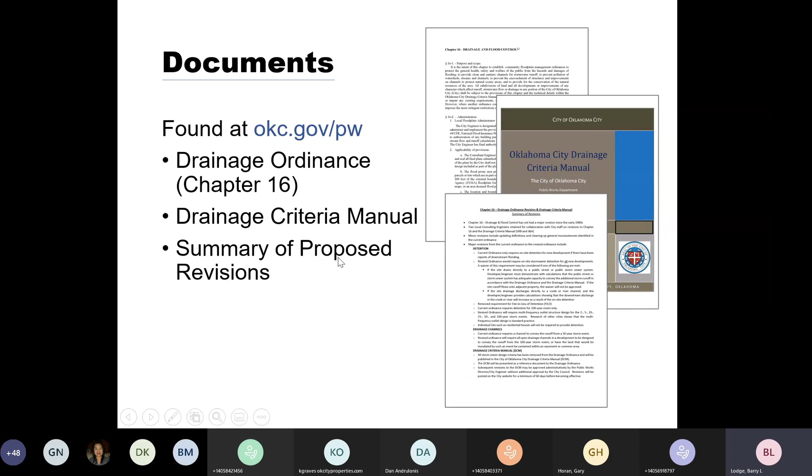What we're going to go over today is the new drainage ordinance that we've revised, and we are putting in place an Oklahoma City Drainage Criteria Manual that's been in the works for about 10 years. Both documents can be found at okc.gov/pw. We have also put up there a summary of the proposed revisions so that you can do a comparison of what has changed. Here are the two documents that we're going to discuss today.

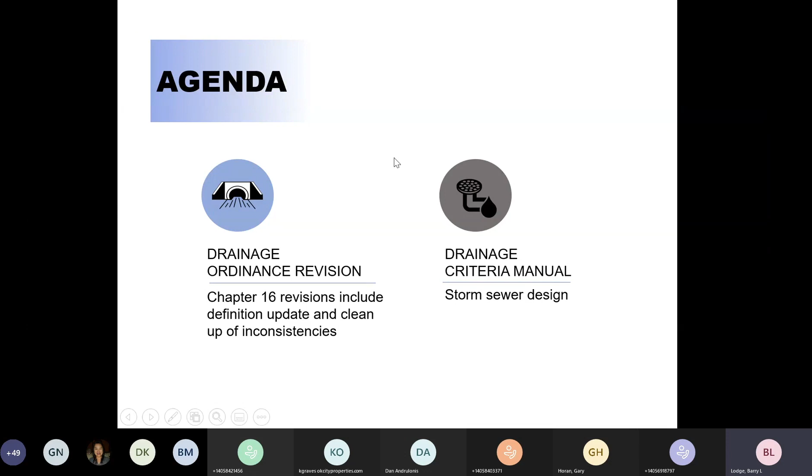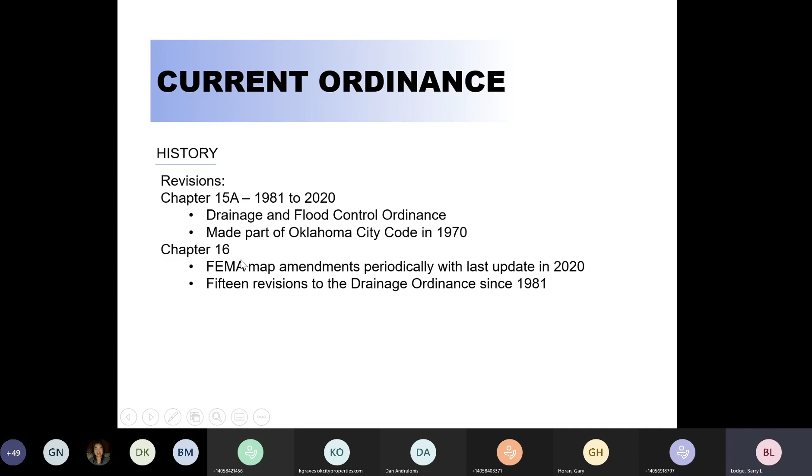A little history here. The current ordinance was developed back in 1970 as Chapter 15A, and from 1981 to 2020, we have had 15 updates to the drainage ordinance, but then also periodic updates to the FEMA maps, which are included in the ordinance. This was made part of the city code in 1970.

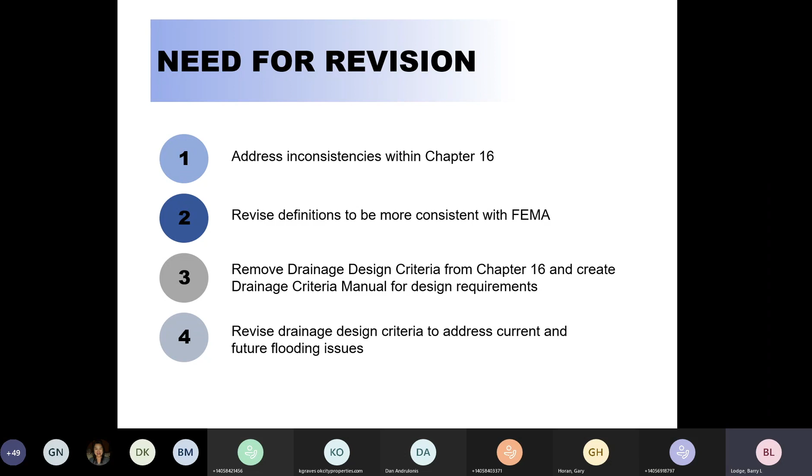And the needs for the revisions: we need to address the inconsistencies with Chapter 16, revise the definitions to be more consistent with FEMA. We need to remove the drainage design criteria from Chapter 16, and that is why we've created the Drainage Criteria Manual for the design requirements. And we're revising drainage design criteria to address our current and future flooding issues. I'll go ahead and turn it over to Barry. He'll give a brief presentation about the changes.

Good morning, everyone. Barry Lodge with the City of Oklahoma City Public Works. I'm going to go through the major changes that we're proposing for the new drainage ordinance and the drainage criteria manual. If any of you were in the meeting last week, a lot of this will be repeat, but hopefully it'll help us all get on the same page.

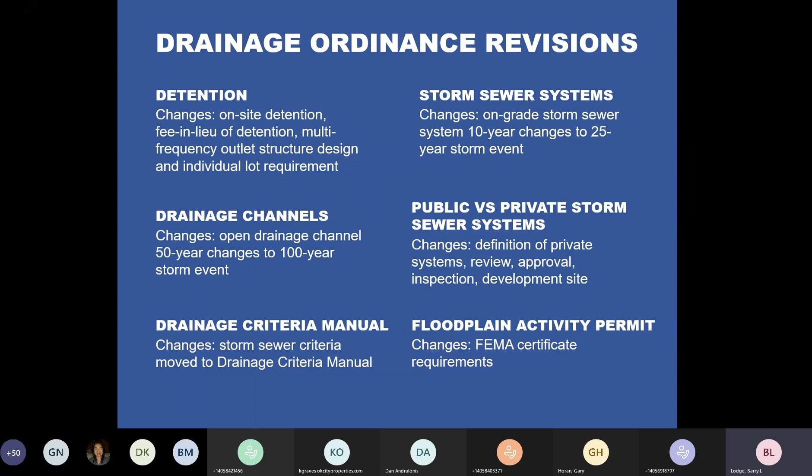I want to start with the revisions that we're looking at on the city detention requirements, and I'm going to start at the bottom of this slide and work my way up these bullet points. One of the biggest changes that we're making on the detention requirements is the change to require a multi-frequency outlet structure design. Currently, the ordinance is written such that we only require detention to be provided for the 100-year storm. We are now going to move into the multi-frequency outlet structure design for the 2 through the 100-year storm events.

We have previously had a provision for a fee in lieu of detention in certain requirements, and consultants that are on the call are probably familiar with that process. With the new ordinance and the new criteria manual, we are going to remove that provision for a fee in lieu of detention. Instead, we will go to a provision for a waiver of the on-site detention requirements if certain criteria are met. So this will put it all back on the engineers and the developers to come up with the calculations to show that the waiver should be granted.

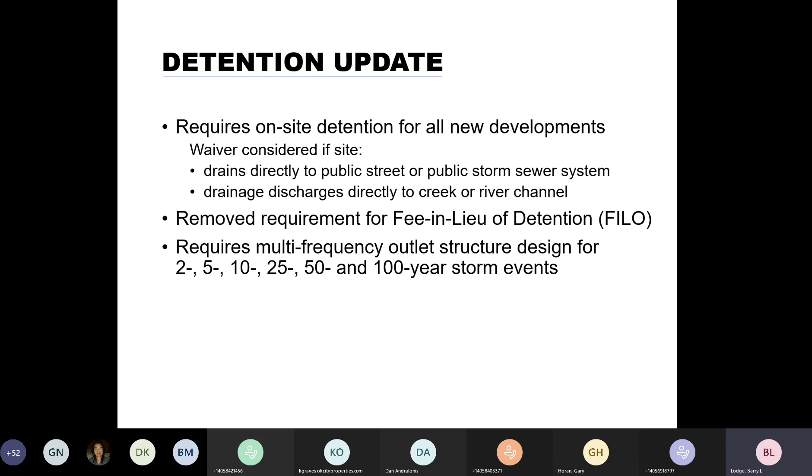On our drainage channels, the major change on our open drainage channels is going to be that these channels will be required to be designed to convey runoff from a 100-year storm event. Currently, that design criteria is at the 50-year storm. We feel that it is going to be beneficial for the public to increase that to the 100-year storm event.

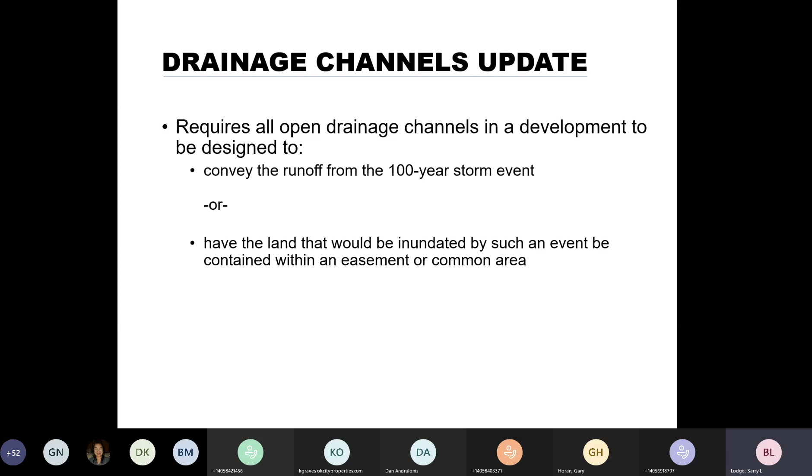The exception to that would be generally in an area that has a natural channel that can go through a common area or an easement that may not be able to be improved due to blue line requirements from the Corps of Engineers. The requirement then would be that whatever land would be inundated by the extent of the 100-year storm event would have to be contained within an easement or a common area. And that would remain as the maintenance responsibility of the property owners, homeowners association.

I want to add one more thing back on this slide. We didn't have it on the slide, but it did come up in some of the questions last week, and that was concerning bridge and culvert design criteria. So I thought I'd address that a little bit here too. For our culverts, the requirement's essentially going to be the same as it has been for a number of years, that all of the culverts will be required to convey the 50-year storm with no more than 1 foot of head at the entrance to the culvert. The additional criteria would be that the Q100 storm event would not overtop the roadway.

For bridges, we would have the requirement that the Q50 will be below the low chord of the bridge, and again, that the Q100 does not overtop the roadway.

Drainage criteria manual. Storm sewer design requirements were previously published in the drainage ordinance. They were part of that ordinance, and we're removing all of the drainage design criteria from the ordinance, putting that in a separate manual. This document, the drainage criteria manual, will be presented as a reference to the drainage ordinance, so it is considered part of the ordinance.

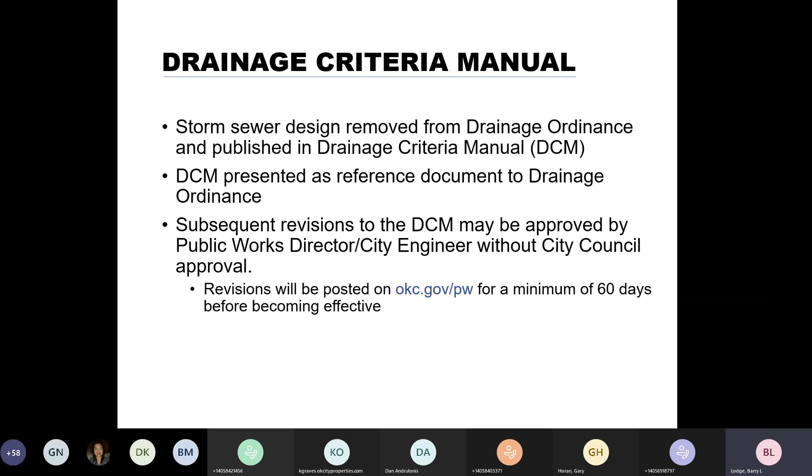Storm sewer systems. Currently, the design requirement is for the storm sewer systems to be designed for the 10-year storm event. We are upgrading that to require storm sewer systems to be designed for the 25-year storm. The requirement that's in place now is that the streets handle the 25-year storm without overtopping the curbs. That will still be a requirement. The change is we'll have to pick up the 25-year storm instead of the 10 at that point.

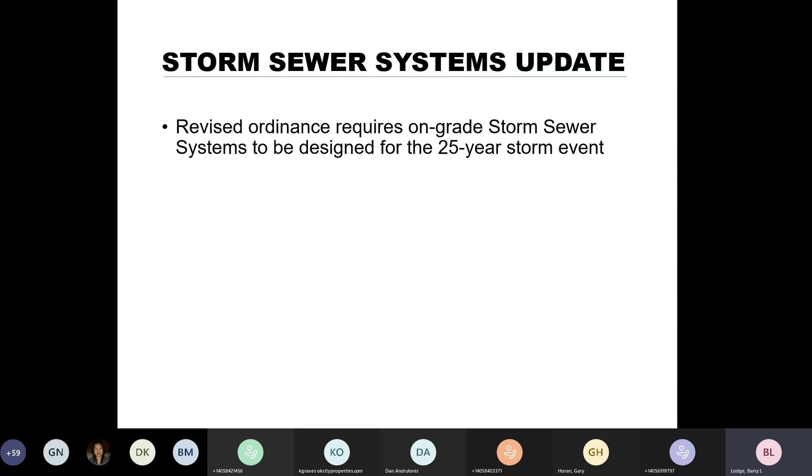Probably the next major change that we've written into the new ordinance and the drainage criteria manual concerns public versus private storm sewer systems. And there's been a lot of discussion and a lot of questions about this issue going both ways, both pro and con, that private storm sewer systems should be inspected and approved by the city, and then we get the opposite argument.

Currently, in the ordinance and the criteria manual, we have the statement that if all of the drainage or runoff is generated by a certain development site, so all that runoff comes from your development site, the storm sewer system would be private and maintained by the property owner. We had a good question last week concerning that. We had just some brief discussions. So we're looking at probably revising this, just due to the fact that we really can't have private storm systems within a public right-of-way.

So the revision we've talked about making, and it's going to be under discussion probably for the next several days, is that if you have public streets, your storm sewer system would be public. If you have private streets, your storm sewer system would be private, and would be maintained by the property owner or property owners, homeowners associations.

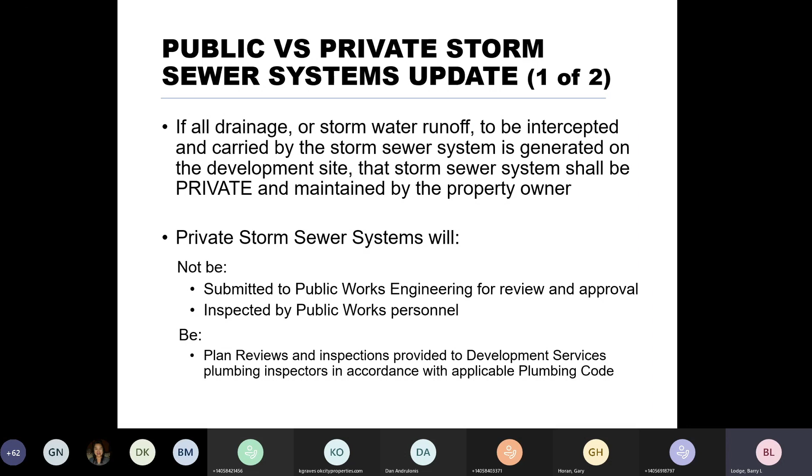The process that we're trying to put in place now as part of the new ordinance and criteria manual is that if we have a private storm sewer system, they will not be submitted to Public Works Engineering for review and approval. In addition, we would not have Public Works inspectors that would be providing the construction inspection on those systems. Those plans for private storm sewer systems would be submitted to development services. They would review the plans, and all of the inspections would be provided by their inspectors in accordance with the plumbing code. And I'm sure there'll be some questions that come up on that part of it.

Public storm sewer systems will be required to be provided by the development when an off-site drainage area of greater than 6 acres enters your development site. Regardless of where it comes from, if it is larger than 6 acres, that would require a public storm sewer system. They'll also be required to provide a public system if there is an existing storm sewer system, whether that be a public or a private system, that discharges onto your development site. And these, as has been the process for years, would be submitted to and reviewed by Public Works Engineering for approval, and inspected by the city inspectors as well.

I brought this up in the meeting last week, and one thing that we've noticed over the past is that with some of the storm sewer systems, there's been question about whether they've actually been dedicated to the city for future maintenance. I would encourage you to put notes onto your plats and other documents where these are expressly dedicated to the city for maintenance purposes of your new drainage infrastructure. A lot of questions have come up in the past about that issue. And so that's something that we're going to be looking for, and something I'd like for you guys to be paying particular attention to as well.

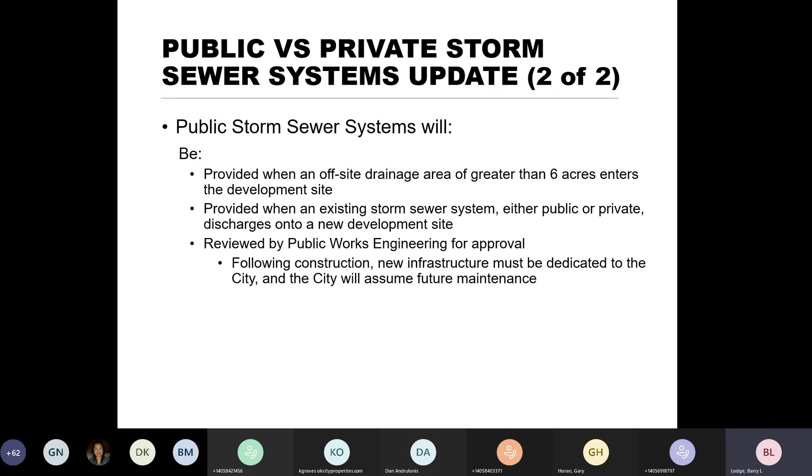One other item we have received questions on concerns floodplain activity permits. Currently, the requirement is that a FEMA elevation certificate is required for any structure that is constructed within the limits of a FEMA mapped floodplain and/or within 200 feet of the limits of that FEMA mapped floodplain. The revision to this will be that if your building structure falls outside of the mapped FEMA floodplain, but is still within 200 feet, you would no longer have to provide a FEMA elevation certificate. A surveyor certificate would be required to verify that the structure meets the established minimum finished floor elevation.

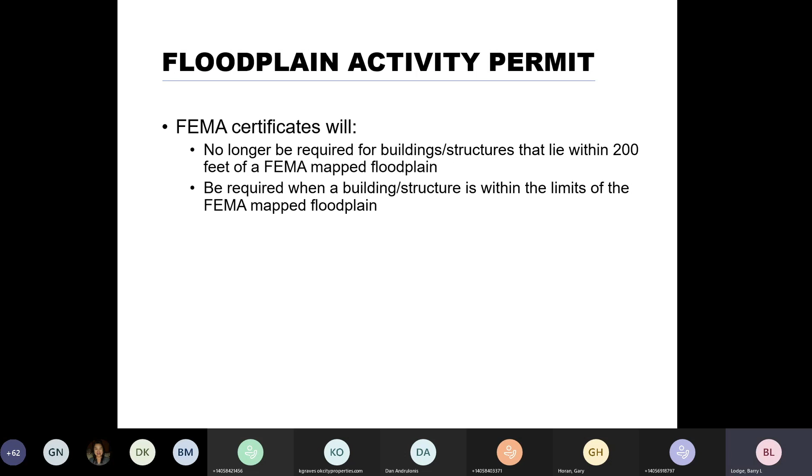If your building structure falls within the limits of the mapped floodplain, you would still be required to provide a FEMA elevation certificate, and that's documentation that we are required to have on hand when FEMA comes and does their periodic inspections. So with that, I'm going to turn it back over to Debbie. Well, we would like to open it up for questions and comments that you may have about our proposed changes. I'm not sure how to get to the chat, but if you'll raise your hand, I will.

I can't raise my hand. I'm on a phone, but could I ask a question or two? May I ask who this is? Yeah, this is Paul Odom. I'm a real estate developer. We've been in business for about as long as the city has been existing. And what's your question? Okay, I've got two of them. One of them is, obviously there's a lot of changes here, and what is the reason for all of these changes?

Well, the reason we're going through and making these changes is we need to take out some of the inconsistencies in Chapter 16. We want to revise those definitions. We're removing the drainage design information from the ordinance and placing it into the criteria manual. And we want to revise some of the requirements to address some of our current flooding issues that we're seeing.

And Paul, this is Eric Wenger. One of the things I forgot to mention when I introduced the meeting, I want to thank both Tim Johnson with Johnson & Associates and Brian Mitchell with Smith Roberts Baldischwiler that are on the call with us today. The city reached out to both of them to assist the city staff in working through some of the required changes. As Debbie outlined, there's a number of items with the ordinance just having not been updated in some time. A lot of the calculation methodologies need to be updated, which are going to be in the drainage criteria manual.

Hey, Eric, this is Michelle. There was a question asked during the first meeting for the PDH certificate. So I just want to remind everybody that we do give out the 1 hour PDH. You can just request it through pwdrainage@okc.gov, then we can have one prepared and email it back to you. Yeah, thank you, Michelle. I appreciate you letting everybody know that. We'll take care of those.